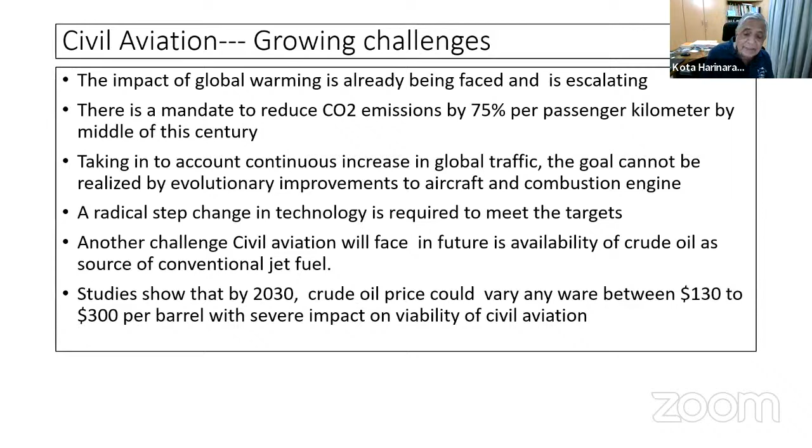Another challenge civil aviation faces is with available crude oil, because the source of conventional jet fuel itself is coming down. Studies show by 2030 the price will increase quite a bit. Today it's something like $80-90, but it will come to $130 at least. This is the situation worldwide, and let us see what happens to us.

So what is the way forward for civil aviation? All of you are now aware of road transport facing similar challenges, as it depends on fossil fuels. To combat these challenges, battery-powered hybrid vehicles featuring less or zero emission have already entered the market, in India, in China, in many parts of USA and Europe. A lot of investments are being made to develop more efficient lightweight batteries and also fuel cells. We are going to discuss about both the things.

The key question for the civil aviation industry: are electric propulsion systems viable for transport aircraft? This is the point, this is the question that is there. As it stands today, for small aircraft it is okay, but for bigger aircraft it is still not all right. Let us see, as we go by, what it is.

As of today, pure electric propulsion suffers from significant performance and weight challenges, and electric powered aircraft are limited to small and general aviation aircraft. Maybe UAM is one of those being considered in a big way. But due to rising fuel prices, regulatory and public pressure to limit air traffic emissions, introduction of electric propulsion, not only on small aircraft but large, is no longer an option but a necessity. Studies show that incremental investments and focused R&D could result in the entry of electric propulsion, but challenges are many to be addressed.

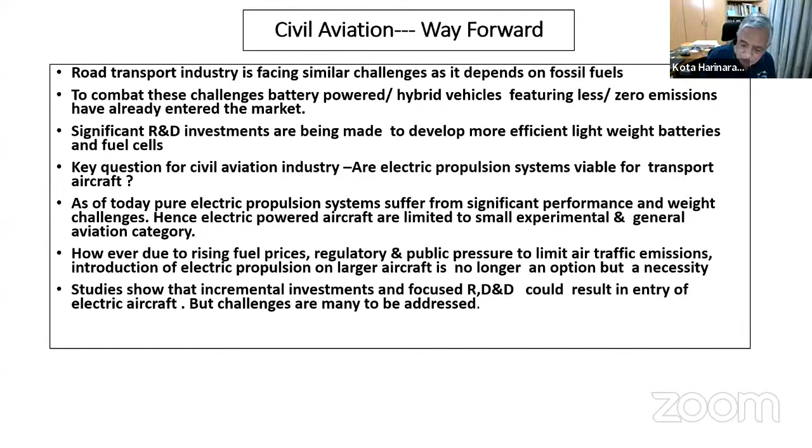This is what let us examine today, this would be of interest to all of us. What are the challenges for India? One is the rising cost and availability of crude oil as a source of conventional fuel, because we import 90% of our crude oil. That's what I said, we need to find alternate energy sources.

India is already the third largest domestic civil passenger market in the world, and by next year we are expected to be the third largest civil market, both domestic and international. Enhanced connectivity is vital for economic development. We are a growing country, the economy is developing, and air connectivity is an absolute must, there is no alternative to that. So it is essential for India to harness alternate energy sources to contain these greenhouse gases while catering to growing traffic.

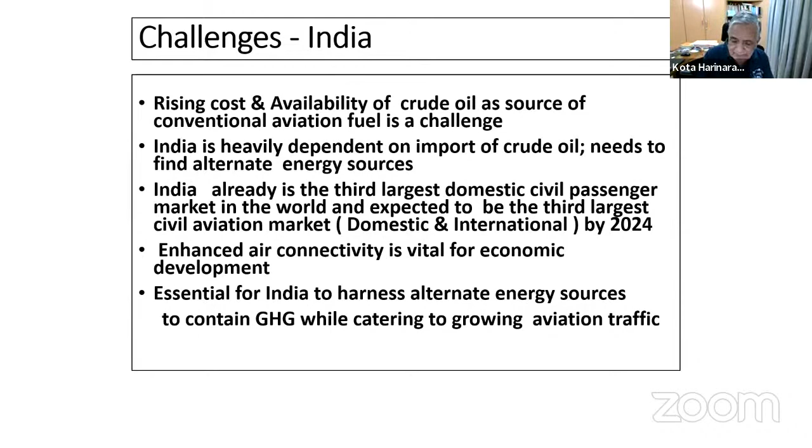This is the crux of the problem. What are the benefits? All of us have heard here and there, but I am trying to put the whole thing together. Today there are around 200 companies, maybe more, around the world investing in startups and projects to develop all types of electric aviation, from retrofit hybrid electric general aviation to long-range commercial planes to eVTOL.

That's what we are going to talk a little more about, urban taxis and all. The electric aviation movement is gaining traction quickly, especially as the industry faces mounting pressure to reduce harmful emissions. But beyond the obvious environmental benefits, there are other compelling advantages of electric aviation. Here are the things important for all of us to know.

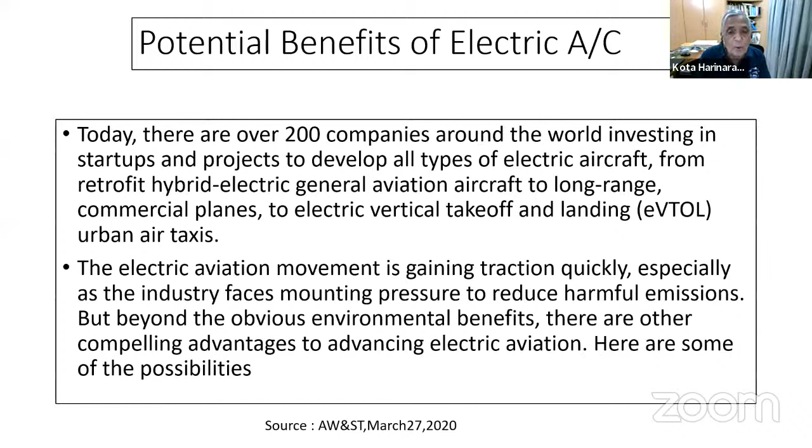Number one, reduced fuel cost. For some in aviation, the decision to pursue electric propulsion is driven by potential cost savings, not necessarily environmentalism. Fuel costs are a major variable expense for airlines. As prices rise, so do the cost of tickets per passenger. High fuel prices are a significant expense and barrier to flying more often. The introduction of a hybrid or all-electric aircraft is a step towards making flying more affordable for everyone.

Most of you have seen that 45% of the direct operating cost in India is fuel alone. So it is much more a challenge here in India, whereas around 25% is the figure in the international market.

Now, for example, this is from Aviation Week. There is a Beaver, a DHC-2 de Havilland seaplane. It was modified a couple of years back to run on a magniX 750 horsepower electric propulsion system with a 4-blade Hartzell composite propeller, a well-known propeller. The electric drive costs about $12 per operating hour, compared to piston motor driving, which ranges anywhere between 300 to 450 per operating hour. See the cost difference. It looks too much to believe, but that's what it says.

Eviation's Alice is another all-electric aircraft, expected to offer operating costs of about just $200 per hour, about one-fifth the cost of a similar turboprop. So in addition to emission benefits, the cost of operation is likely to be low once the technology matures.

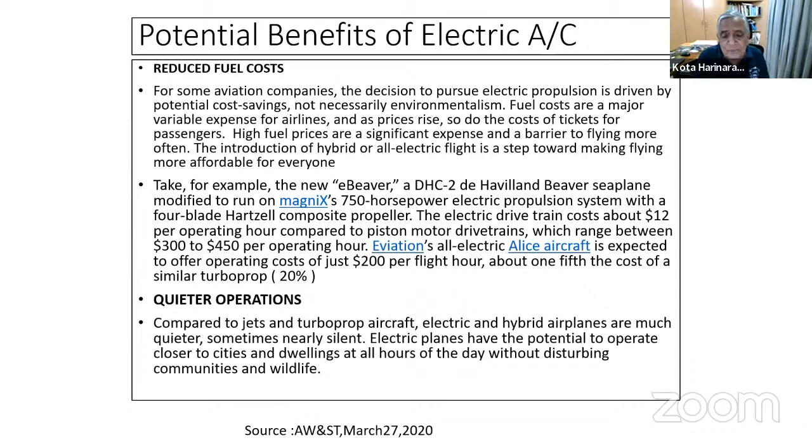In Europe and elsewhere there is strict regulation. Beyond 10 or 11 o'clock at night, you are not allowed to fly. But with an electric aircraft, where it is silent, you can fly 24 hours. That is the benefit.

Now there is another important point, that is reliability. Motors are much simpler compared to internal combustion engines. There are fewer moving parts, making them less susceptible to wear and more reliable. The hope is that electric aircraft will require less downtime for maintenance, reducing operating costs. So maintenance cost will come down. Maybe as we come to a reasonably mature state, this will be a very important factor for all of us.

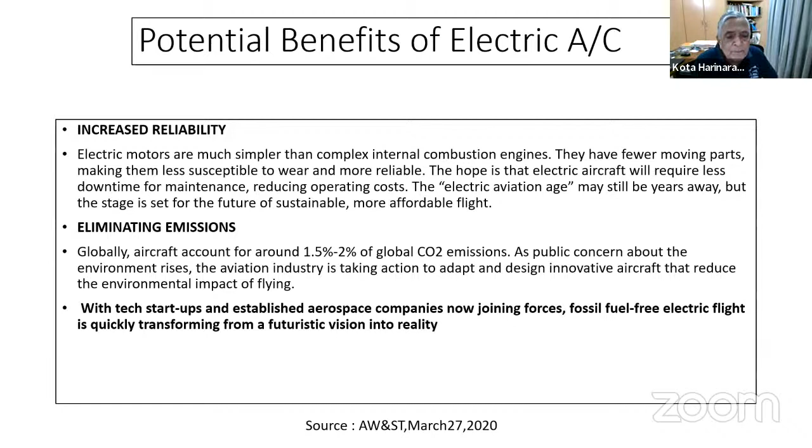Globally, aircraft account for about 1.5 to 2% of emissions. But we have to remember that at higher altitude, the impact of this is sometimes 3 times what happens when you are on the ground. So this is important. With tech startups and established players joining forces, fossil fuel-free electric transformation is quickly moving from a future vision to a reality. This is important for all of us.

Now, you are all involved in aircraft design, but let's see what the challenges are. Electric propulsion aircraft leads to new challenges. For conventional aircraft, a large statistical database of component weight, geometry, performance, and system categories is available from many previously designed and built aircraft. For electric aircraft, no such database is available, and configuration systems cannot be generated based on statistical data.

Statistics are very, very little, so we need to know how to go about it. Even the regulations do not cater to electric propulsion—you have to read across. There are no clear-cut regulations today, whether in Europe, USA, or anywhere. Okay, and this is a challenge.

The way energy is stored is also totally different from conventional energy, because fuel, kerosene, we store in wing tanks, and when you store that it has a significant impact on structural design—it is a relieving load. Some of you are structural designers, you will agree with me. Operational aspects of electric aircraft are also different.

The conventional gas turbine propulsion has direct dependence on ambient conditions - density, temperature - and the aircraft continuously loses weight due to fuel burn. But electric propulsion is totally different because there is no weight reduction, hardly anything. That impacts the performance, so in your modeling, your thinking, your calculation, this is an important issue.

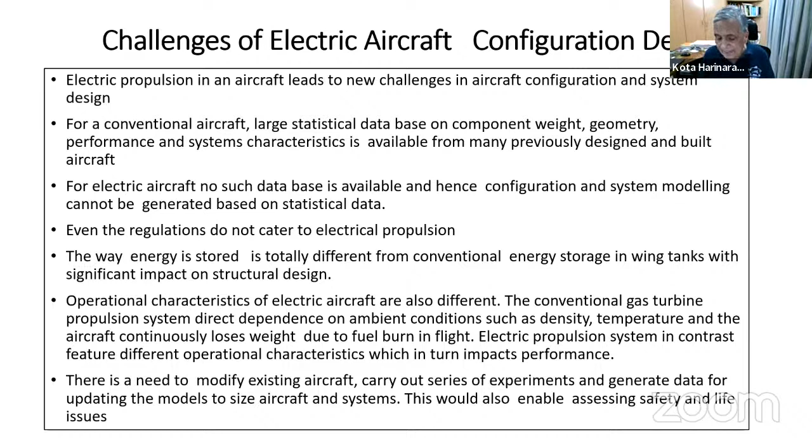There is a need to modify. Suppose initially you have to modify an existing aircraft to carry out a series of experiments and generate data for updating the model to size the aircraft. This would also enable assessing safety and life issues. These are the important things, because we don't have a database - we have to create it, work out safety issues, and see how the system is going to perform. So these are the challenges of configuration design. This is what you have to keep in mind.

Now let us look at, without spending too much time, what are the zero emission technologies. One is biofuel, synthetic SAF, where your conventional fuel is replaced by biofuel. Here carbon dioxide intensity comes down depending upon source. Air quality, NOx and particulate matter emissions are similar to diesel. Total cost of ownership is slightly different. The powertrain is same as combustion, no different. Refueling is almost the same, not much different. You can use existing infrastructure - this is the benefit of going for biofuel.

Now hydrogen - it can be used instead of aviation fuel. Here again, it's minimal if it is green hydrogen, and there are no significant NOx emissions after treatment. For renewable hydrogen H2 production, there's about 30% more cost or so. H2 engine has similar capex as diesel, but you need an H2 tank - the tank requirements are different here. This is a challenge, but the engine is the same size as today. Tanks are required though, and it may take a little longer because the volume is 4 times the volume. Though energy content is much higher, the volume is higher, so you need more time for fueling. But infrastructure - you have to create the hydrogen infrastructure.

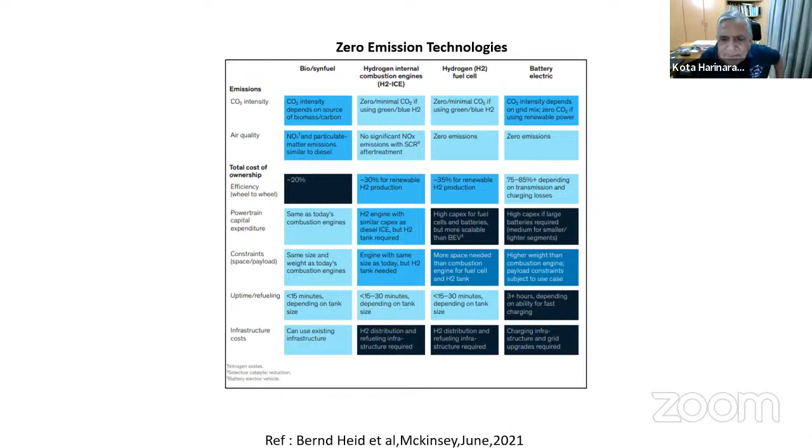So broadly, if you look at it, the hydrogen fuel cell generates electricity, and the battery also stores electricity and supplies it. These are the two areas - fuel cell and battery - that are really the electric propulsion system. So that is what we'll consider now.

Now here again, I'm putting to you the efficiencies because this is important for our thermodynamic cycle. The best performance efficiency for a kerosene turboprop engine is 50%. In fact, quite often most engines I have seen are much less, maybe around 40%, but the best you can get is 50. Gearbox is almost 98%, propeller around 80%, so you get overall efficiency of 39%. Turbofan, you get about efficiency of 50%, fan and nozzles are around 65%, so overall about 33% is the efficiency. Battery, as we discussed, is 100%.

Battery, if you are considering, controller is 98%, electric motor about 95%, gearbox about 98%, propeller about 80%, it varies a little bit. The overall efficiency, if you see, is 73%, almost double that.

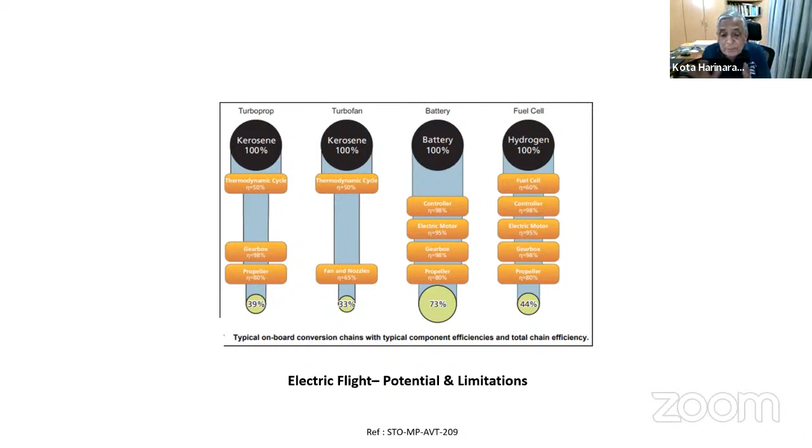Fuel cell itself is about 60%, unlike battery and all, about 50%, but better than turbofan and turboprop. Controller, all of them are very high efficiencies, but overall you get about 44% efficiency. These are very important parameters which all of you must keep in mind.

It's a massive thing. How do we cater to this? This is the challenge that we have to see how to do. Of course, a lot of improvements are occurring in battery technology, but it will take years, and we need to see how to handle this. This is the challenge we have to deal with. Let's see the next slide.

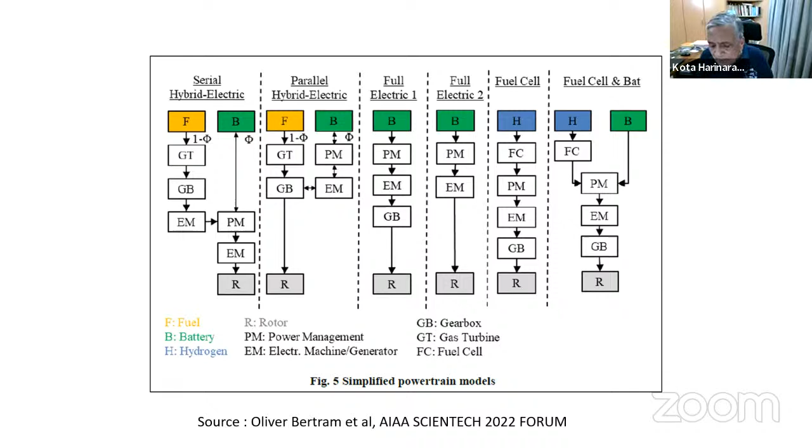Now, today, what is the state of art? The thinking is by 2025, say 1 to 2 seats, small aircraft possible. In fact, today 1 or 2 aircraft are already flying, yet to be certified, but in another couple of years they will get certified. So UAMs which can carry say 1 or 2 passengers, or unmanned, or cargo, or emergency medical vans, all of that can be possible.

We could do that. A lot of other challenges, but it looks to be these are the kind of things with a small range, maybe 100 kilometers or so, looks to be it is possible to do. These are the things which appear possible in the next 2-3 years.

The next one is what they call hybrid. They say another 5 to 10 years, maybe up to 15 to 20 seats, is possible. A lot of work is going on.

Already there is a 19-seat aircraft with one conventional engine, and another with hydrogen power. Things are going on, so it may take another 5 years or so, but by 2030 it seems to be possible.

Hybrid aircraft with even 100 seats are possible in another 10 years. The prediction is that about 70-80 seats, or 50 to 80 seats, full battery or fuel cell powered aircraft may take another 5 years, but 35-40 seats is possible sooner. In other words, another 10 to 15 years, a fully electric aircraft is possible, whether battery or battery plus fuel cell. But battery has certain challenges, fuel cell has certain challenges.

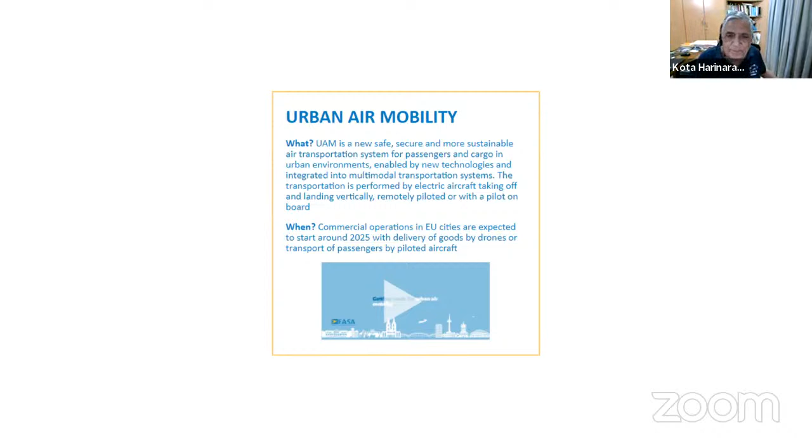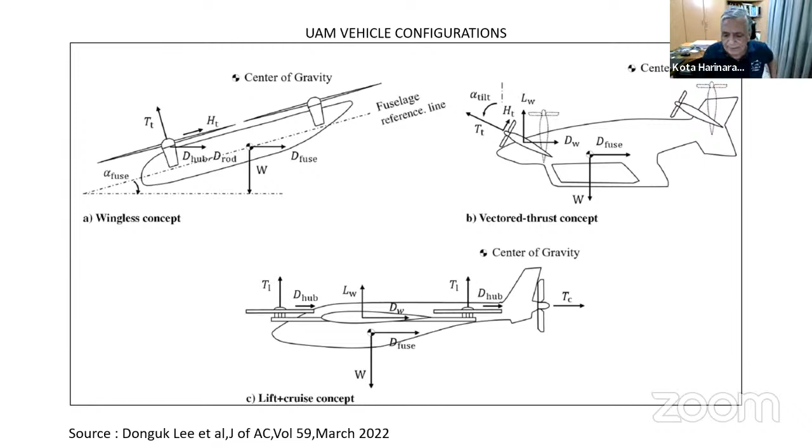Now, these are the configurations we talk about, but you need electric energy. So storage of electric energy is a crucial parameter. For electric propulsion, large amounts of electric energy have to be stored safely and readily available on board. In principle, various technological storage options exist. The most common are batteries, fuel cell systems as we discussed, and also capacitors.

But there is a difference. Capacitors outperform in power—instant power, power per unit weight, capacitors are good there. But they are very, very inferior when speaking of energy storage by weight; very little energy they can store. So capacitors are used for very short durations, a few seconds, where very high power is required.

In contrast to that, fuel cells mark the other extreme. A fuel cell is only an energy converter, it does not store energy. Hydrogen goes into the fuel cell, and the fuel cell converts it into energy. So the energy is stored externally, mostly as hydrogen or a light hydrocarbon fuel. Hydrogen is the best way, but there are other options.

In long-term low power applications, fuel cells are good—low power, like after takeoff, after climb, when you are cruising. At cruise, you may need only half or even 40% of the power, and there you can use a fuel cell. But for initial takeoff or climb, you need a lot of power, so fuel cells are not good for that. Therefore, for higher power demands, fuel cells do not reach the weight-specific capacity of batteries, so a combination may be a good thing.

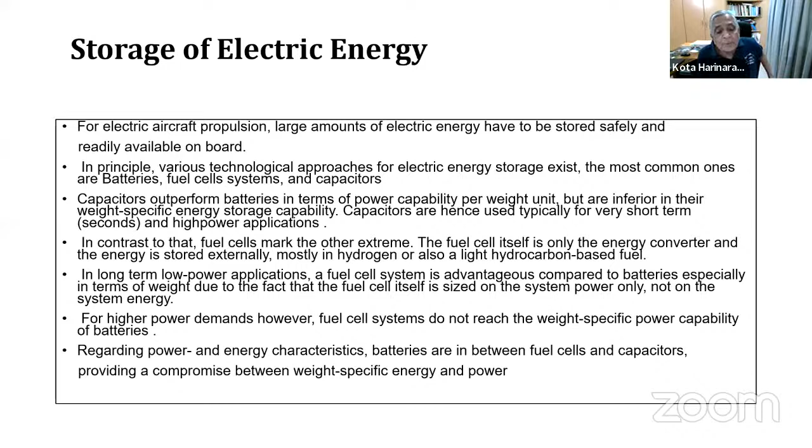In terms of power and energy characteristics, batteries are in between fuel cells and capacitors, providing a compromise between weight-specific energy and power. Let's see.

This is something all of you are very familiar with. Today the state of the art is about 150 to 170, even 200 watt-hours per kilogram. There are already a number of cells - this is at cell level, around 300 watt-hours. And pack means when all cells are put together with battery management and everything, you lose something like 32% of capacity for the same weight.

So the battery pack is heavier because all these things have to be put together - you have to keep this in mind. What you talk of as a cell is not the same - you have to increase the weight by another 30-35% when you talk about the pack. We'll be talking about cells, but you can't use just a cell, you have to use a battery pack.

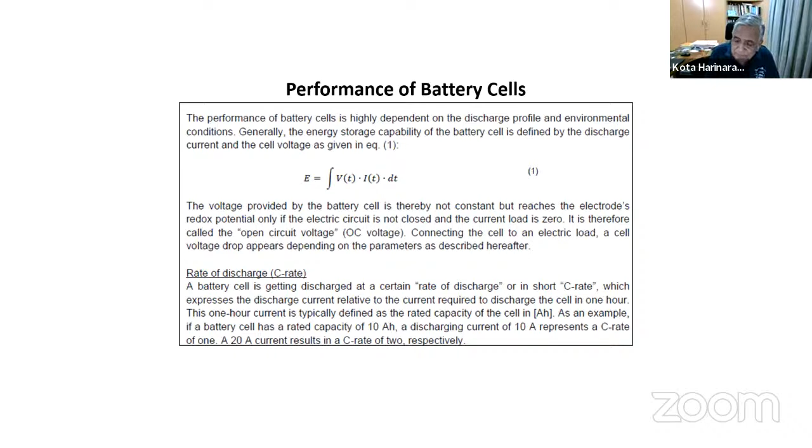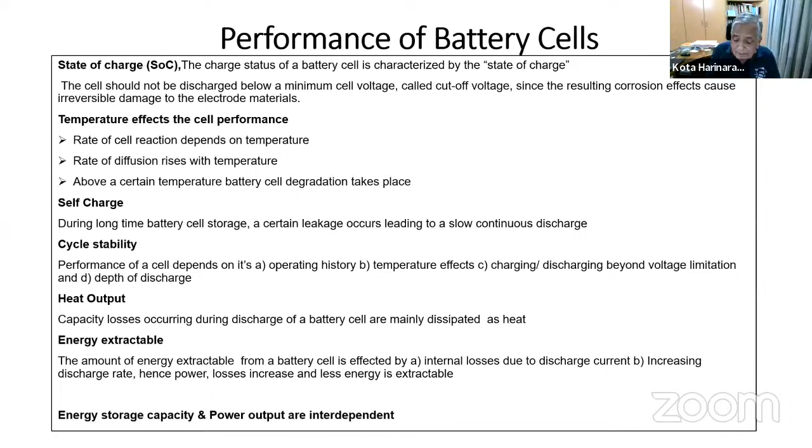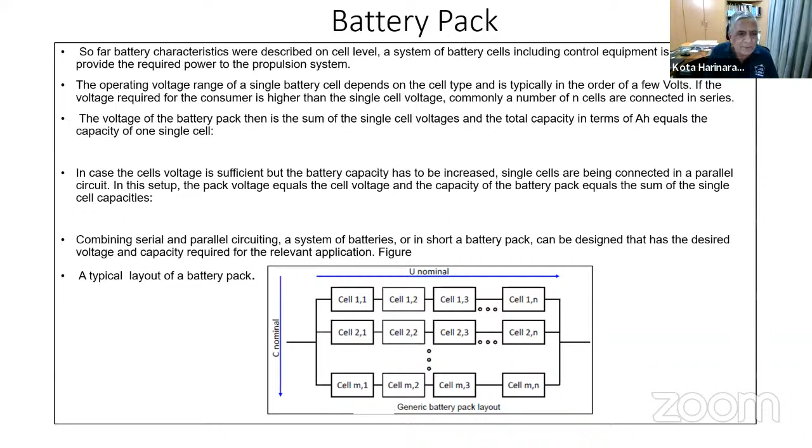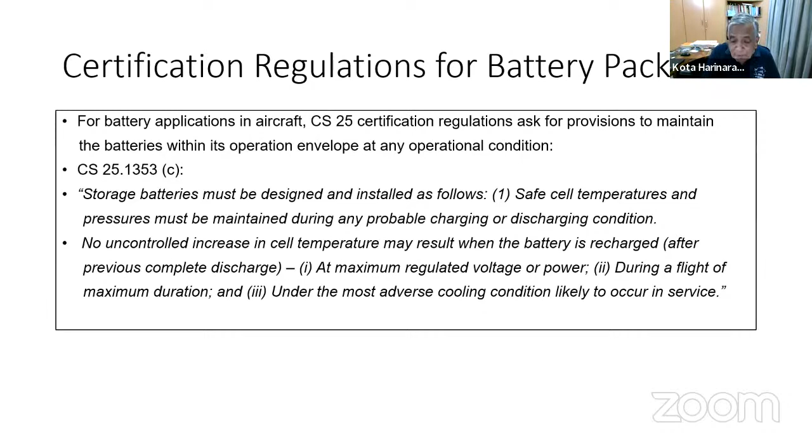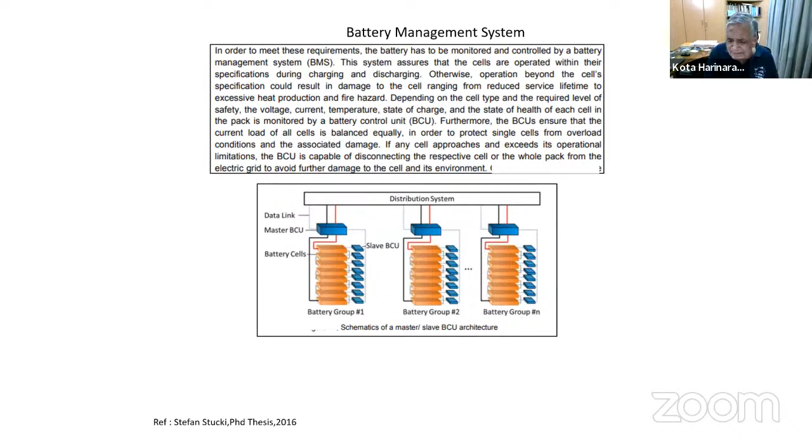The BCU ensures that the current load of all cells is balanced equally between cell to cell, in order to protect a single cell from overload condition and associated damage. If any cell approaches or exceeds the operational limit, the BCU is capable of disconnecting the respective cell or the whole pack from the electric grid to avoid further damage. Here, for example, I have given three groups: if damage occurs, the whole group is removed so that the rest of the system remains safe. This is what you call a battery control system, where they use a master-slave concept. Just to give you an idea, this is a very critical component, and there's no use having a battery without a battery management system.

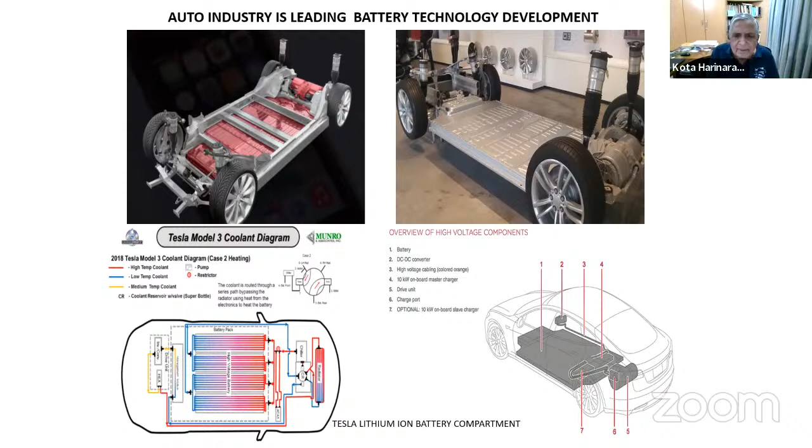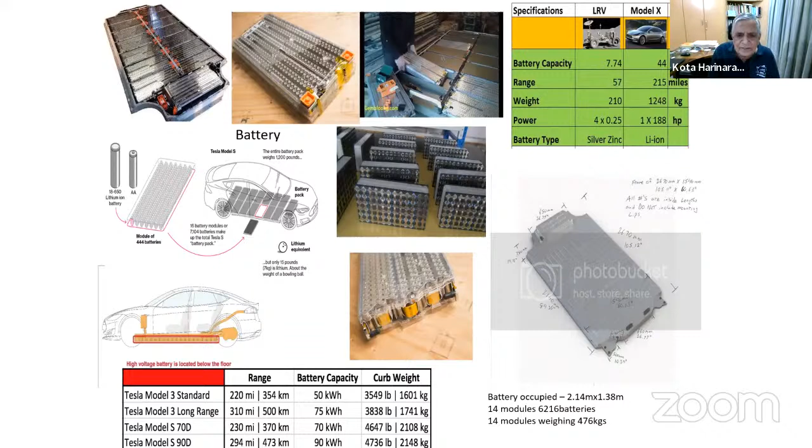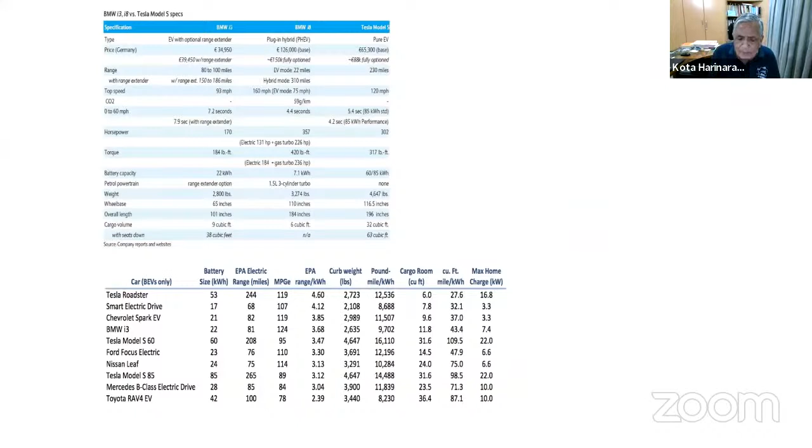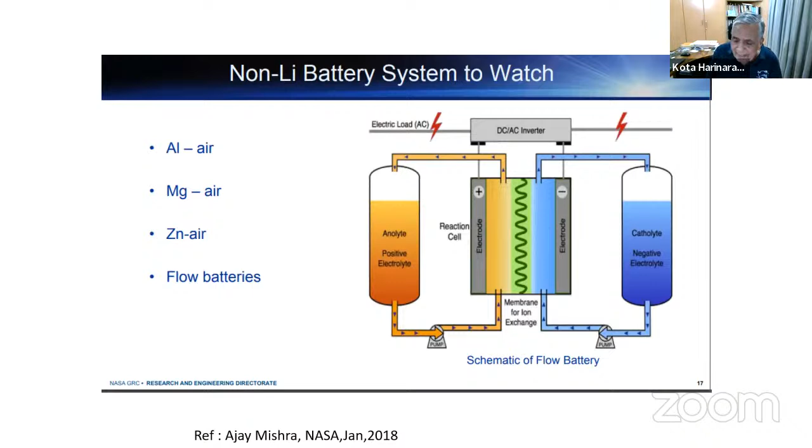Now, we have been talking about lithium-ion batteries because they are the ones being used now in most ground vehicles. But there are others: aluminum-air, magnesium-air, zinc-air, and they are called flow batteries. They have a lot of benefits. A lot of work is going on, for example aluminum-air is called a primary battery, and other options are also there. We'll not go too much in depth into that.

So there was a NASA reference, four years old but still relevant: if you have a cell at 250 watt-hours per kilogram at the cell level, at the pack level, as we said, you can remove about 30%, for 2 to 3 passengers, for a VTOL with 40-50 miles range, all electric. This is the kind of scenario that's now happening.

You see, this is what is happening in the world. Lately, better now, something like 10 passengers, a lot of work is going on where battery is of 400 watt-hours at the cell level, 300 watt-hours at the pack level.

Now, talking another 8 to 10 years, we are talking 600 watt-hours at the cell level, 400 to 500 at the pack level. Here we can do something like 50 to 70, but conventional takeoff and land, and all electric. I'm talking about pure electric. Possibly this can be done, but the range is lower. If you want bigger range, we have to see how to increase it.

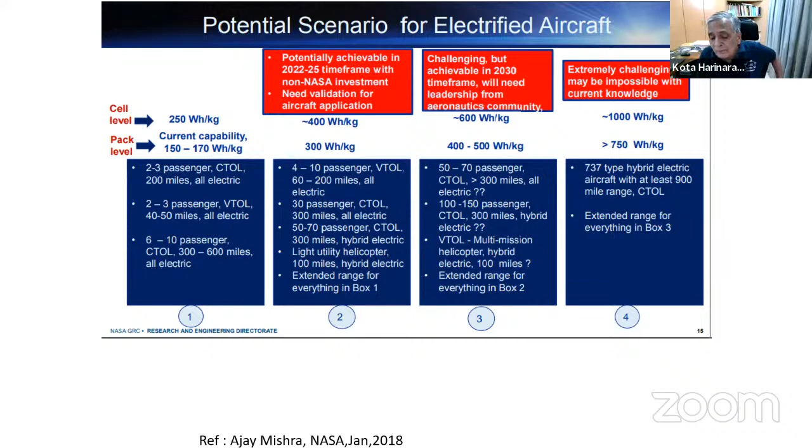So this is extremely challenging, but it looks to me, the last one I've written, a lot of technology development has occurred, a lot of acceleration has occurred. That is the next slide I want to show you.

Seems to be good. Already they are doing pilot, commercial is already going on. So it looks like the rate at which the technology is growing is faster than what NASA predicted about 3-4 years back. So we could expect things will happen pretty fast.

Now, let me talk a few minutes about the fuel cell. It converts the chemical energy in a fuel to electrical power without any combustion, no exhaust from fuel, totally carbon free if hydrogen is used as fuel. If you use some other fuel, there may be some emissions, but there is no NOx or anything like that. Hydrogen can be in either liquid form or gaseous form.

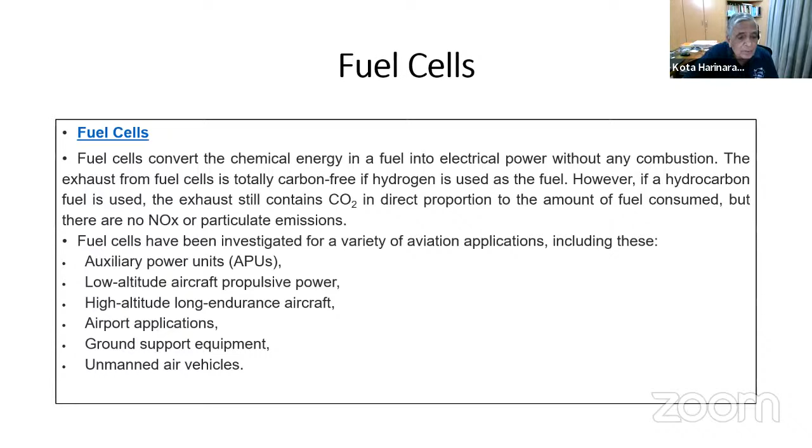Already there are many units, there are experimental stage auxiliary power applications — most popular are low altitude aircraft propulsion power, high altitude long endurance aircraft, airport applications, ground support equipment, and unmanned air vehicle fuel cells being used. I'm just going to show you one picture.

This is the fuel cell for an aircraft. Almost some 8-9 years back at DLR, Germany, they built this for operating the nose wheel. You can see here all the elements of a fuel cell. That's why I'm showing this picture to you — you have a small fuel cell, a small fellow, but around which big paraphernalia is required.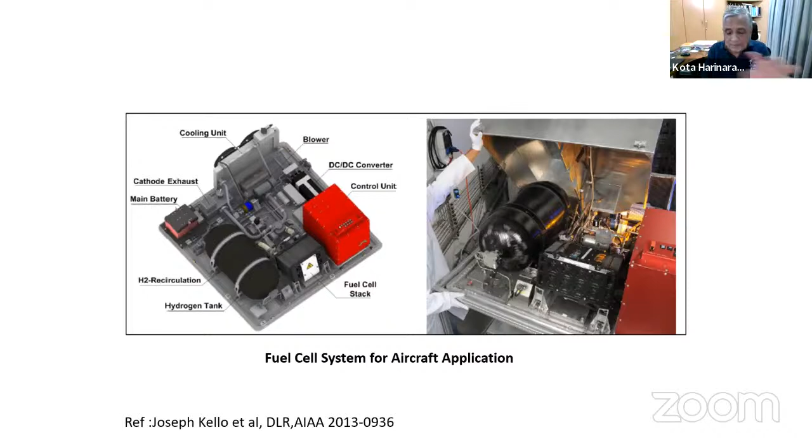You need a hydrogen tank, hydrogen recirculation. You need a small battery, as I will talk to you, for operating this fellow. Then you need a cooling unit, a blower, a converter, and a control unit. So this is the full pack — this is basically the kind of thing we are talking about. So it's not just the stack, but the paraphernalia which has to go along with that.

What are the characteristics? There are two main types of fuel cells. One is called proton exchange membrane — it operates at only 80 to 120 degrees centigrade, fairly low temperature. But there is also solid oxide fuel cell, which operates at very high temperature. Because of that, it is not so popular, though some work is going on for aircraft. Most aircraft fuel cells are proton exchange membrane fuel cells, since the operating temperatures are low and can be managed. That is the reason PEM fuel cells are popular today.

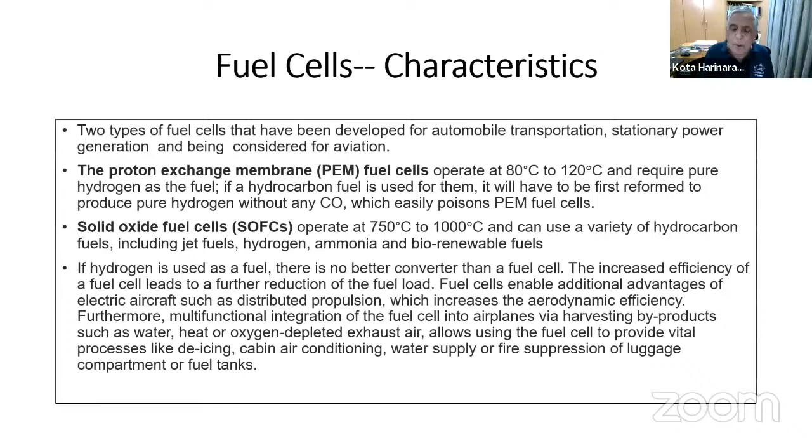So I was telling you that for very short duration, you need high power — then you need a capacitor there. Fuel cells, you need for a long duration, small power. Battery is in between these two. And sometimes you can just use a fuel cell and battery — you don't have to use a capacitor at all. And that's how most of the operation is done.

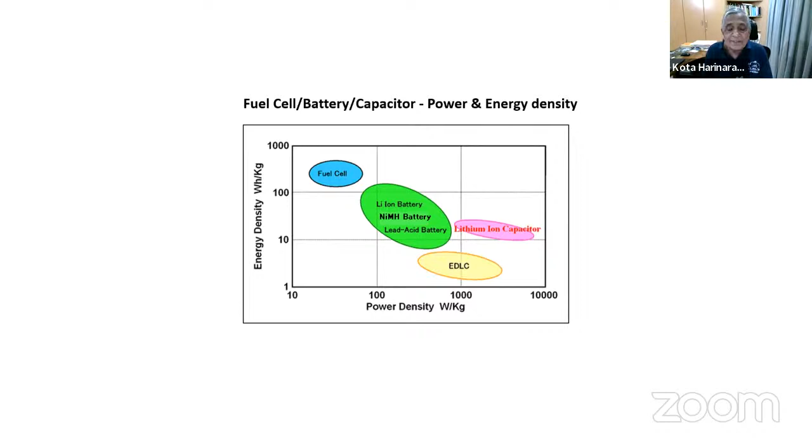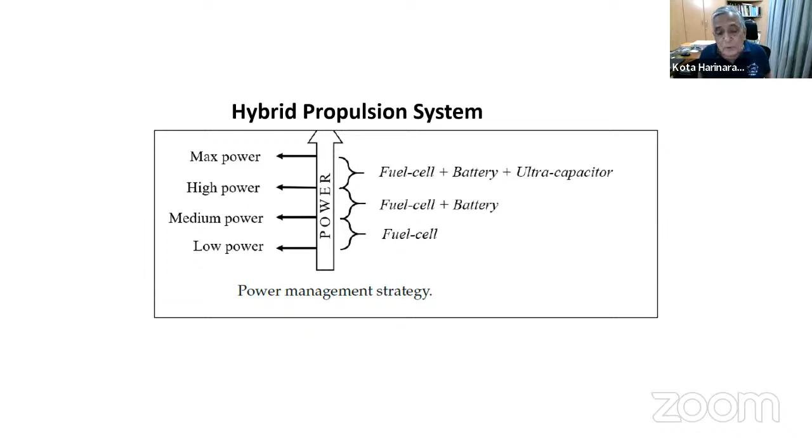This will give you an idea of power and energy density, how you can play around — this is important. So hybrid propulsion means very high power — you use fuel cell plus battery plus ultra capacitor. High power, medium power — fuel cell plus battery. Low power, just for cruise or so — just fuel cell. This is the power management strategy that is being used, and this is the configuration you need to look at.

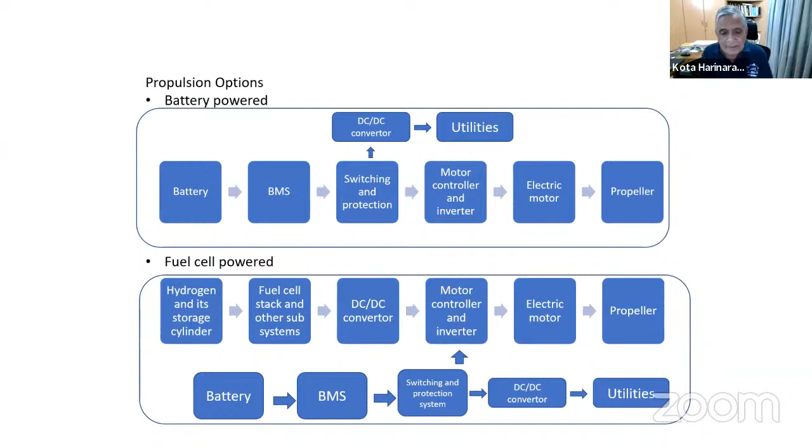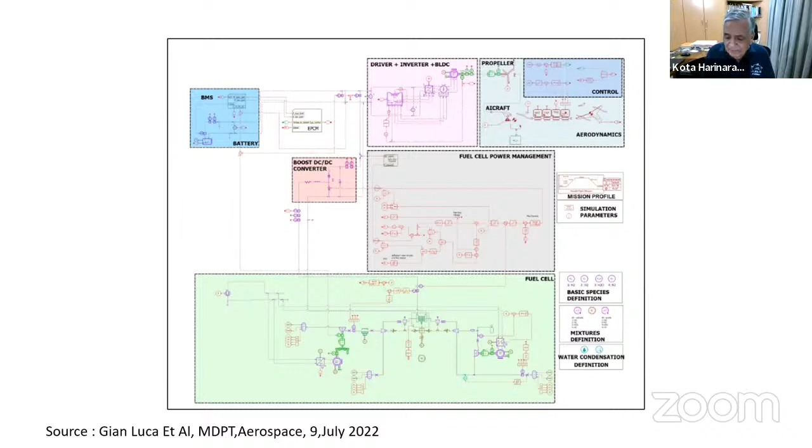If you have a requirement of range, say about 200 kilometers, anything above 100 kilometers, it looks like we'll need this kind of a thing. That's what the study shows - I will show you that. This is what you can simulate. I wanted to show you this picture because a lot of simulation work is going on, and recently, July 2022, about 8-9 months back, they did a beautiful simulation. You can look at this paper, and it will give you a very good idea. You can clearly see the battery, the converter, everything has been simulated, and this is the way we have to do the design.

Now I'm talking about energy storage, energy conversion and all. Just 1 or 2 words about motors, because after all, you need a motor. For aeronautic and particularly fully electric aircraft, you need a motor with high power density, high specific torque value, rotating compatible with propeller, chosen to avoid a heavy gearbox, possible to work in overload for a few minutes, and very high reliability.

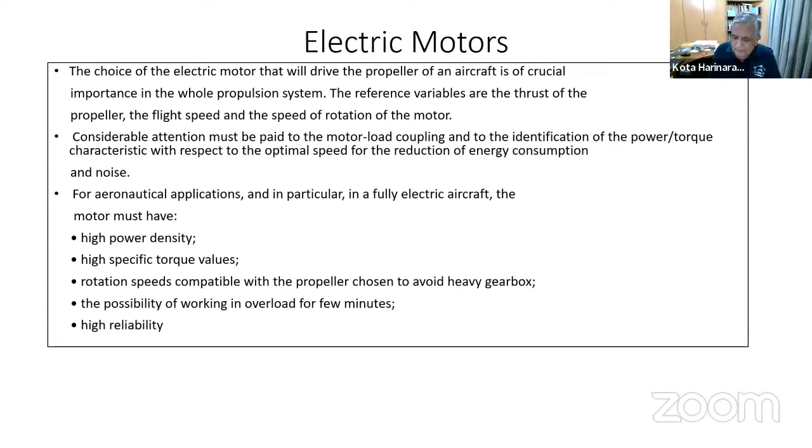Motor technology has been there, but now a lot of improvements are taking place. Types of motors are brushless DC motor, brushless electric motor, BLDC motor, permanent magnet synchronous motor, switched reluctance motor, and induction motor. Induction is one of the oldest ones, and it has an efficiency problem and all.

So other motors are used, but there is one more category: high temperature superconducting motors. If your requirements are something like 1 megawatt, 2 megawatts or more, high temperature superconducting motors are being developed, especially about 2 megawatts. For UAM and all it has no relevance, but you must remember this is an area where a lot of work is going on and a lot of attention is being paid. These are the ones possibly they will be used.

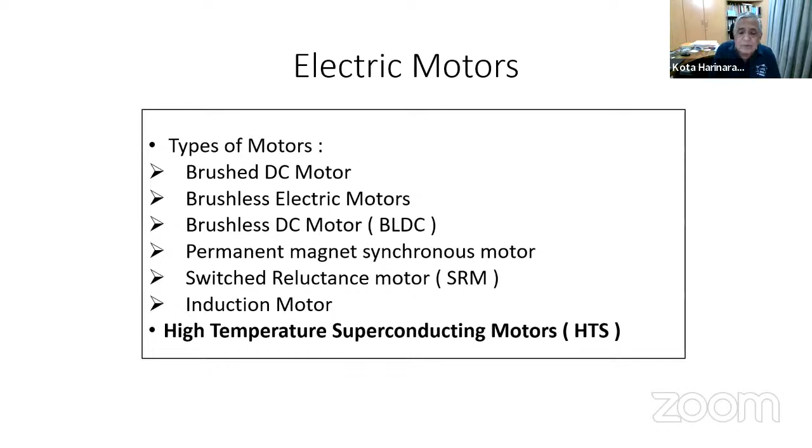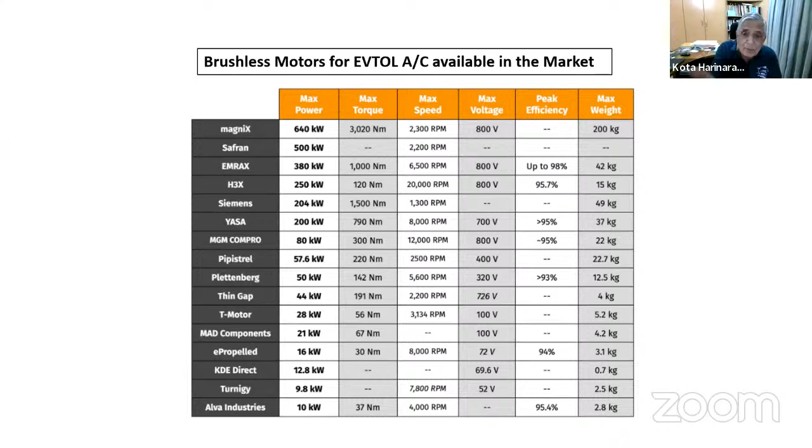If you want to have a 100 passenger or narrow body aircraft equivalent to a 737 or A320, that's what's going to be there. Lots of brushless motors for eVTOL are available in the market. You all must be aware of that, but for completion's sake, I found quite a few are there - very small to very high capacity. They're all available, and fairly good weight benefit is there, but a lot of further improvements are also taking place. EMRAX is one of the very popular motors available in the market.

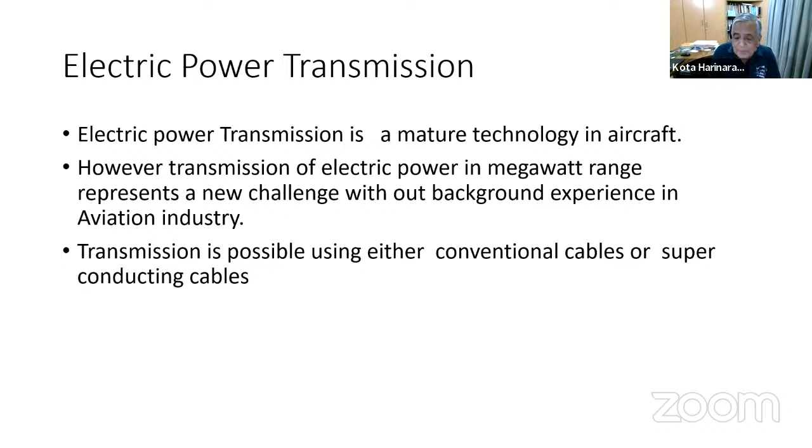So you have a motor, you have got energy, but you have to transmit the power. So you need cables, and you also need DC-DC or DC-AC converters. I'm not going to spend time on this, but they are important. They weigh - they have to be done properly, otherwise we'll have a safety problem, weight problem, and heating problem. So the switching we're talking about is DC-DC, DC-AC.

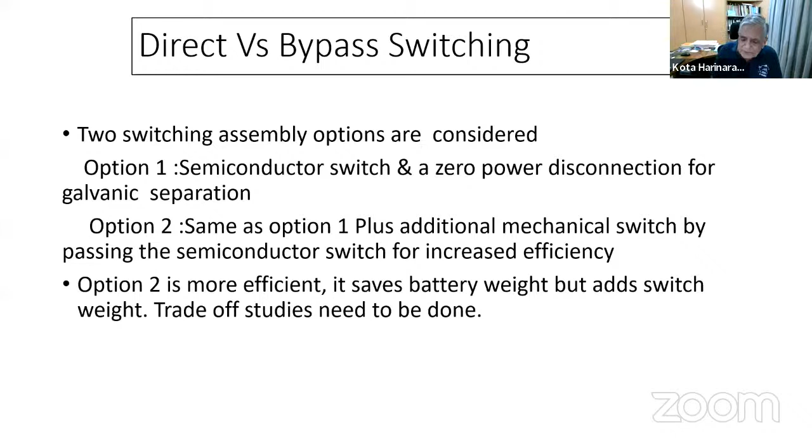There are two things: mechanical switches are no longer considered good. You have to use a semiconductor switch - either as a zero power disconnection semiconductor switch for galvanic separation, or the same with addition of a mechanical switch bypassing the semiconductor for increased efficiency. Option 2 seems to be efficient and saves battery weight, but also adds switch weight - overall it seems to be a better option, and I'm seeing quite a few of our studies using this now. So you need to look at it.

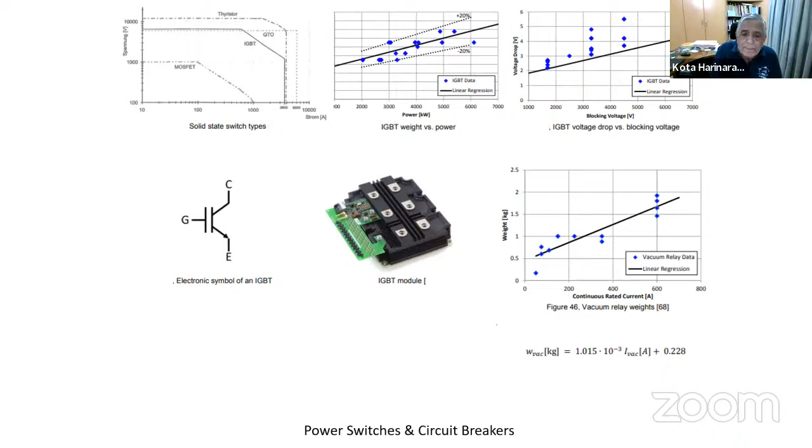A very typical IGBT module - these solid state switches seem to be extremely popular. There are solid state switches available. These are the kind of things which will be useful to you in your calculation.

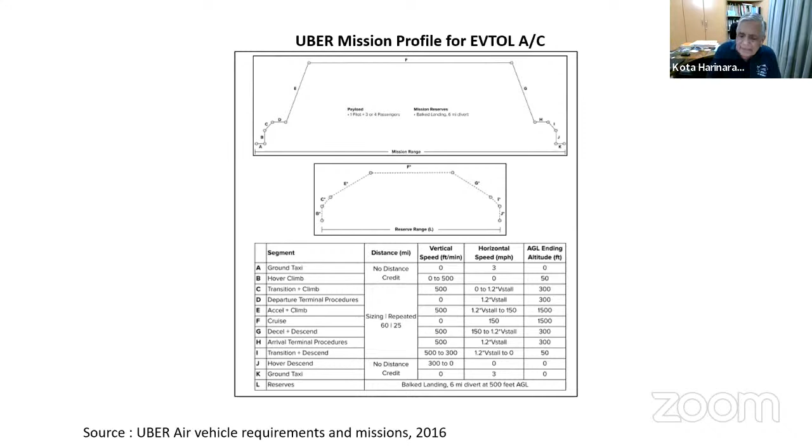This is basically the kind of thing we are looking at. What are the things? They talk about range, takeoff, reserves, repeatability, and battery rapid charge ceiling, minimum state of charge for dispatch, very important. I had already spoken to you about minimum reserve state of charge and battery floor. These are the kind of things they're talking about. I'm not going to spend time, but these are important for you to remember.

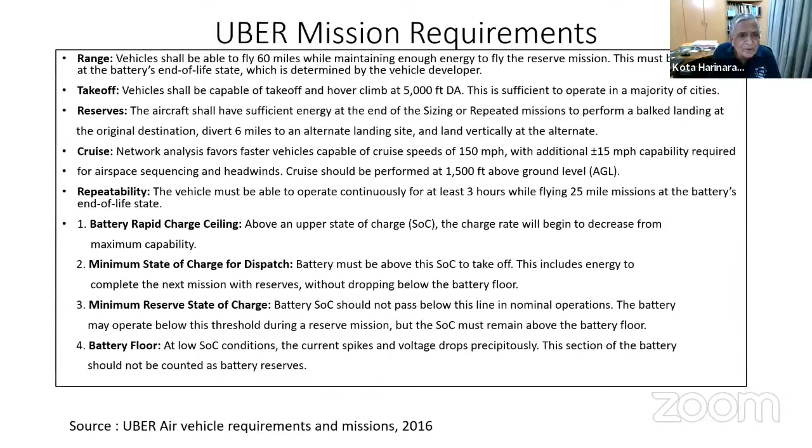And there are safety requirements: noise, energy storage, skyports, charging infrastructure, pilots, network communication, payload. All of them are available, but they are important for you to know what they are talking about. It's the very first document that came about 5 years back, which has really helped a lot of studies to be done. A lot of changes have occurred, but it's a good document to look at.

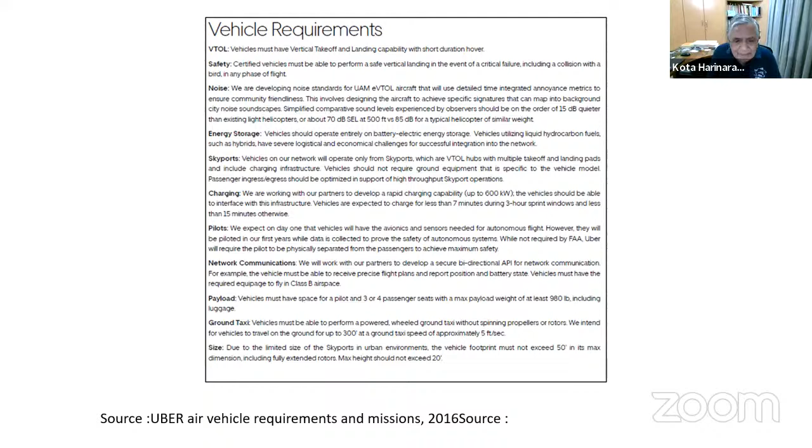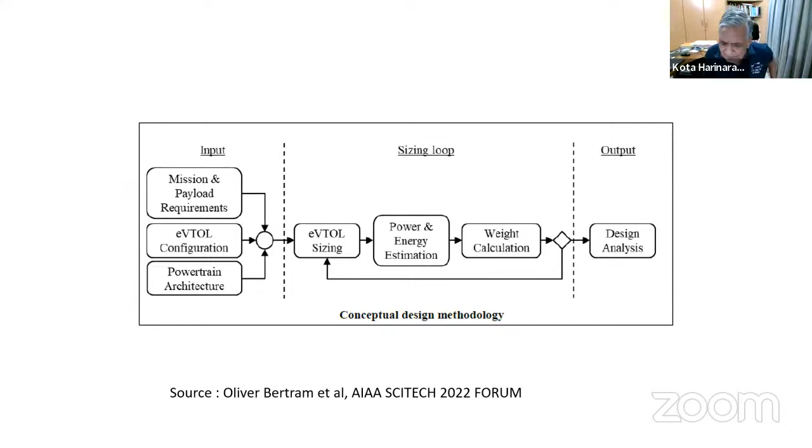This is a recent paper from 2022. I have given the source, you should have a look at it. It's a well-written document. There is also one paper from 2021 Elsevier.

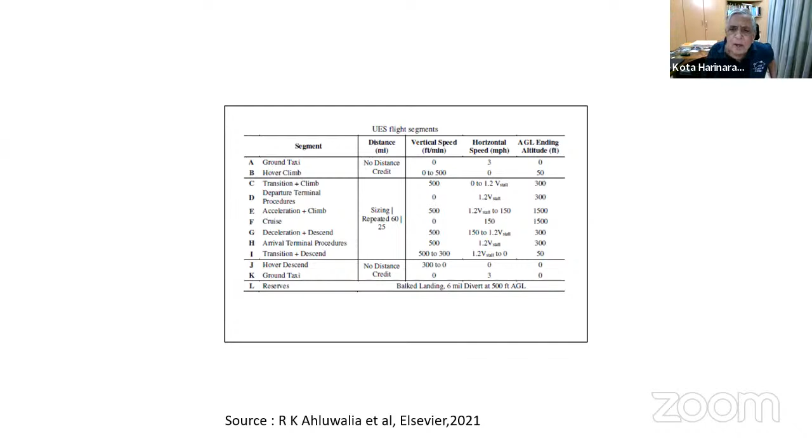They talk about UES flight segments, typical like what we said in the other paper I showed. He's giving what are the kind of speeds, altitudes, distances, all that kind of thing. Then he talks about what kind of payload - we're talking about a payload of 450 kilograms. If that is the case, he talks about airframe weight equals about 55% of the weight, 60% available battery capacity, that means 20% battery SOC floor. This gives you a rough idea of what the numbers are either way.

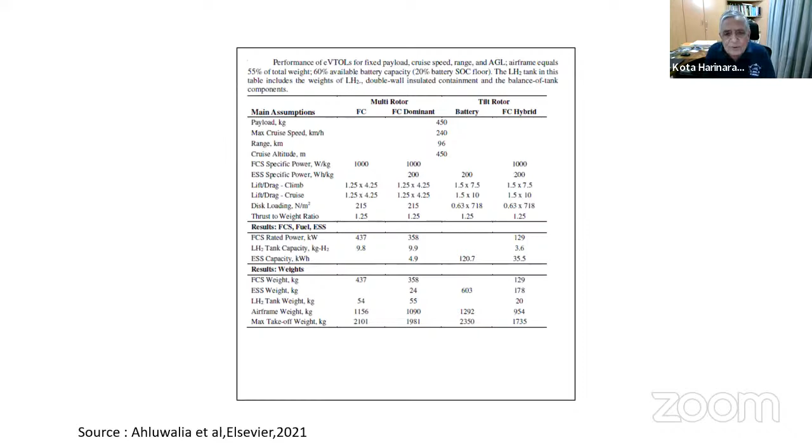That gives you a good idea of what is happening in the world. That's why I'm showing you this. Now I wanted to show this because you should look at this paper.

A fuel cell battery hybrid system sizing method for an eVTOL aircraft, fairly well written. It's talking about - suppose you have only battery, we call it the degree of hybridization. Degree of hybridization 1 means pure battery. Degree of hybridization 0 means pure fuel cell. You can do an optimization between pure battery to fuel cell or anything in between. This is the simple formula he has put there. I thought it is important for you to know this.

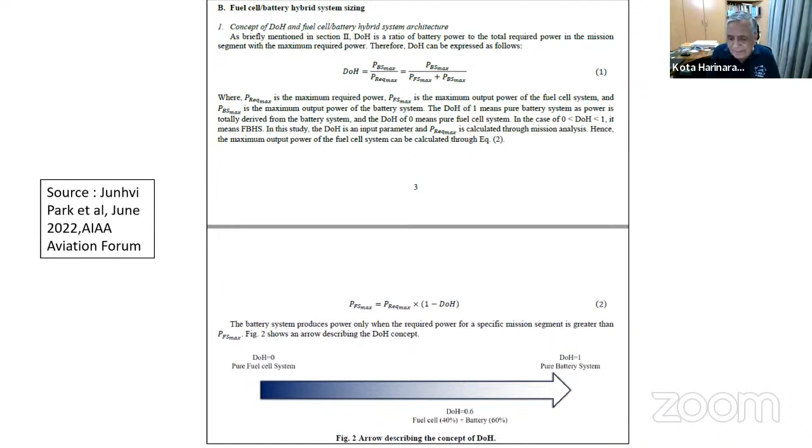And it's June 2022, about 8-9 months back. This came in an AIAA aviation forum. I thought it is important for you to see this particular thing. It's available in open source. So this is the typical optimization from configuration, design, and optimization. You can put that, okay?

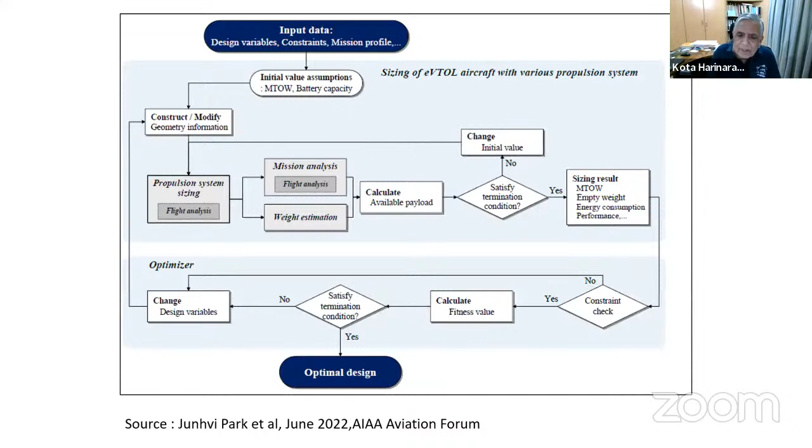The paper I talked about is from what is called Korean University. So worth looking at. They have done a very good study, a lot of modeling, and got pretty good results. So I thought you could look at that one.

I want you to remember this important point. Certification requirement for critical systems asks for 2 basic design principles: redundancy and fail-safe characteristics. What does redundancy mean? In case of a failure of a single system component or subsystem, it can be fulfilled by at least one other independent system. This is what you call redundancy. But what is fail-safe? The fail-safe requirement, in addition, assures the initial failure is contained so there's no adverse effect on other systems.

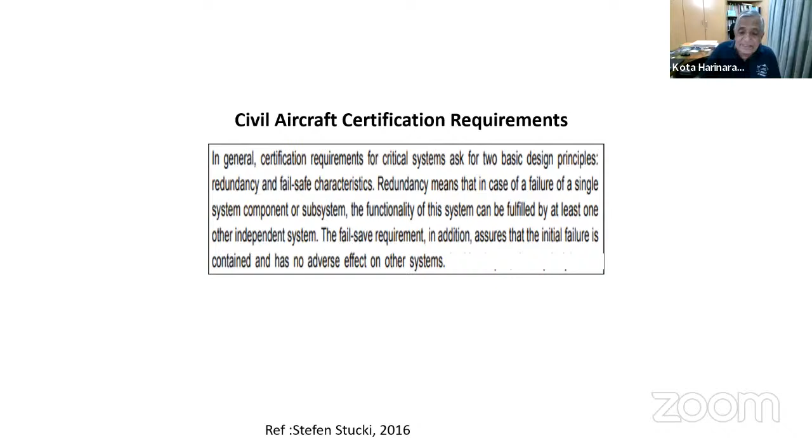Both are important for you to design your vehicle, both must be taken into account. If there is no redundancy, it is not acceptable. If it is not fail-safe, it is not acceptable. So keep this point in mind, and this will help you in designing something which can be considered from an operational point of view. So this is what I was thinking I should present to you.

This is what I thought would be important to you. So this is what I wanted to convey to you. I hope I've been able to convey a few points important for the propulsion. Thank you.